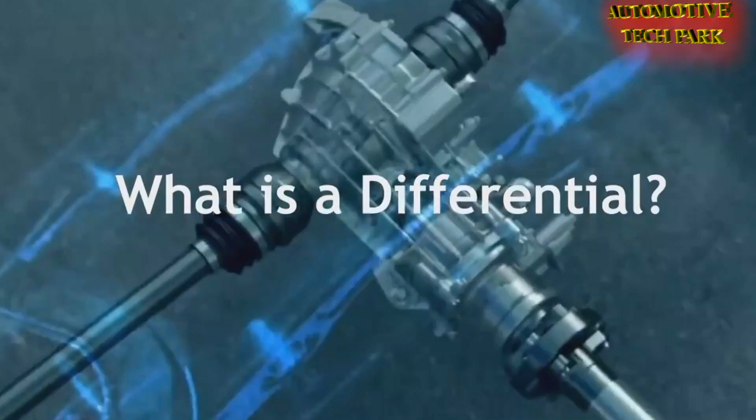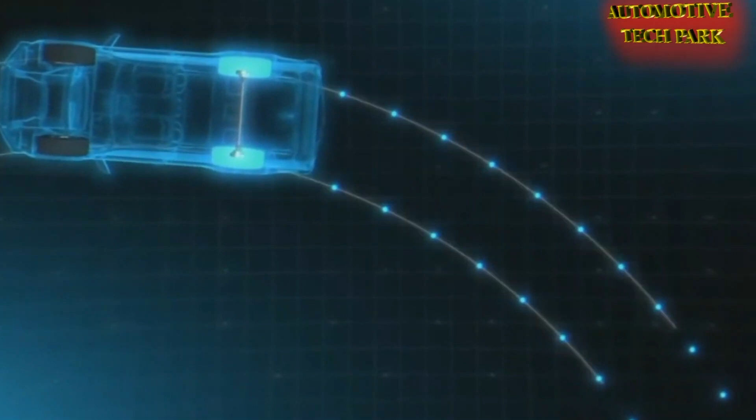What is a differential? Simply put, a differential is a system that transmits an engine's torque to the wheels. The differential takes the power from the engine and splits it, allowing the wheels to spin at different speeds during cornering, but at the same time, it gives equal torque to each wheel when both wheels have the same traction.

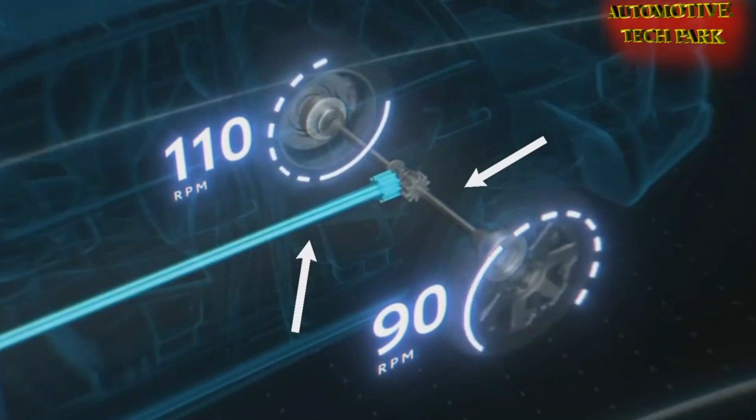A system of gears in the differential is arranged in such a way that it connects the propeller shaft to the rear axle. At this point you might be asking, why would each wheel spin at different speeds from each other? So that's what we'll discuss in today's video.

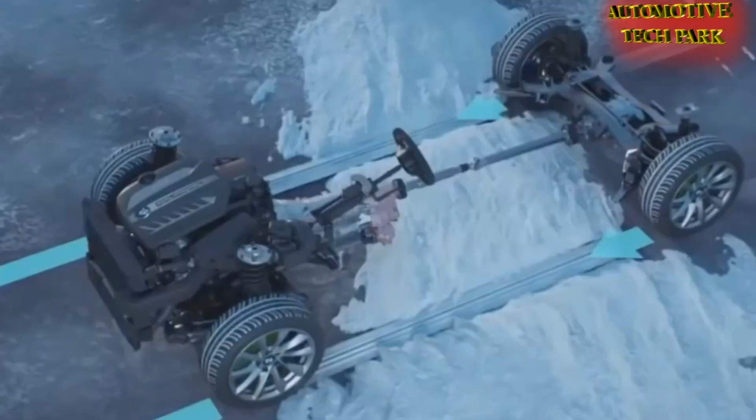The differential is found on all modern cars and trucks, and also on many all-wheel drive full-time vehicles. In 1827, the first conventional automobile differential was invented by a French watchmaker, Onésiphore Pecqueur, and it was used in steam-powered vehicles. In 1932, Porsche used the first limited slip differential.

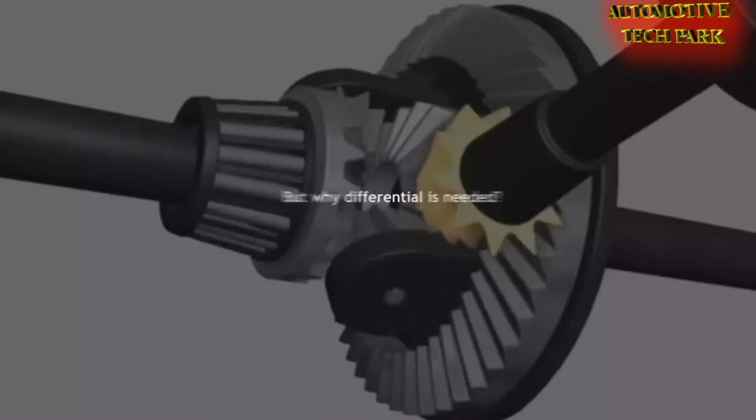But why is a differential needed in a vehicle? When the vehicle is turning, the differential allows the outer wheel to rotate faster than the inner wheel. This is essential when the vehicle turns, causing the wheel outside the turning curve to roll further and faster than the other. The differential allows the wheels to rotate at different speeds, so the car can corner without putting excessive wear on the tires.

If the axle does not allow the wheels to turn independently of each other, the tire of one wheel will be pulled across the ground.

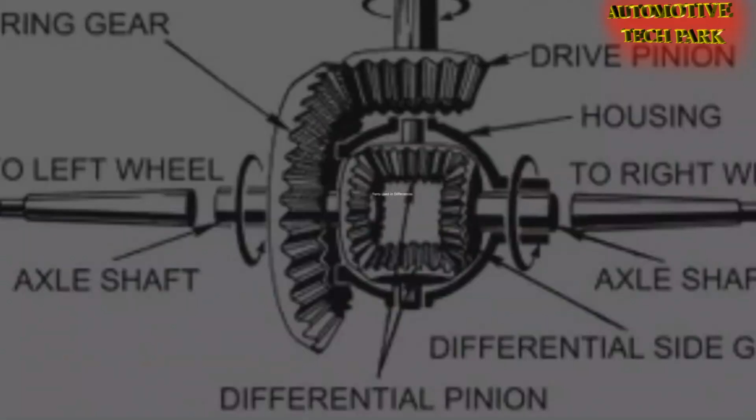Now let's find out what the different parts used in a differential are: differential side gears or sun gears, planet gears or spider gears, ring gear or crown wheel, drive shaft, bevel pinion, and axle or half shafts.

Let me give you an overview of these parts in detail. The ring gear transmits the power to the planet pinions, sun gears, and finally to the half shafts, so that power can be used to drive the wheels.

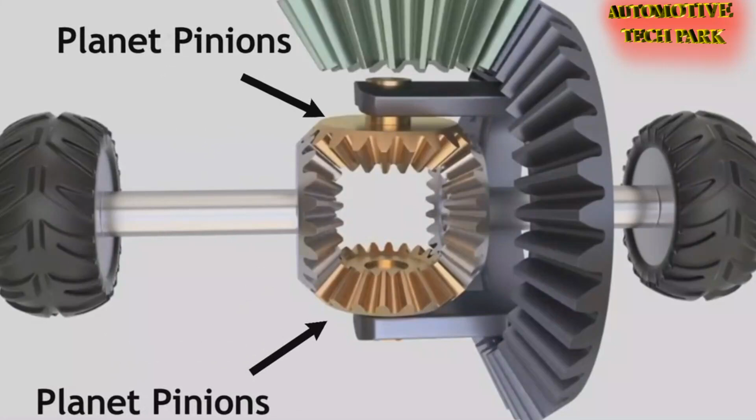Two planet pinions, or sometimes four planet pinions, are placed opposite to each other and are meshed with the sun gears, to transmit power to the rear wheels by half shafts.

The power from the gearbox is transmitted to the propeller shaft or drive shaft, and from there sent to the bevel pinion. The function of the bevel pinion is to transmit power from the propeller shaft to drive the ring gear. There isn't a single shaft connecting the two rear wheels; instead, two half shafts are used to connect them in the automobile.

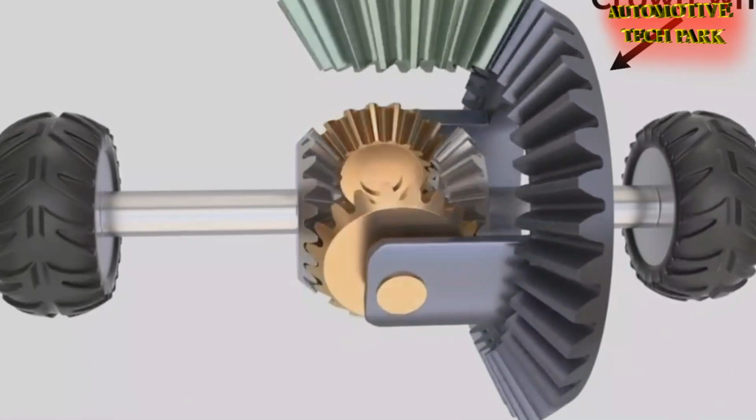The crown wheel is free to rotate on the half shaft, and these half shafts are splined to each of the sun gears.

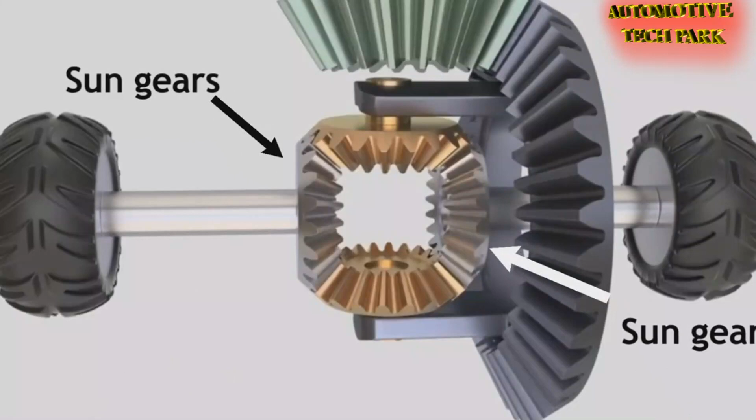Two sun gears are employed for the working of the differential, which are opposite to each other, and these sun gears are connected to the half shafts to drive the power.

How does a differential work? The power from the engine is transferred to the ring gear through a pinion gear. The ring gear is connected to a spider gear, which is at the heart of the differential system.

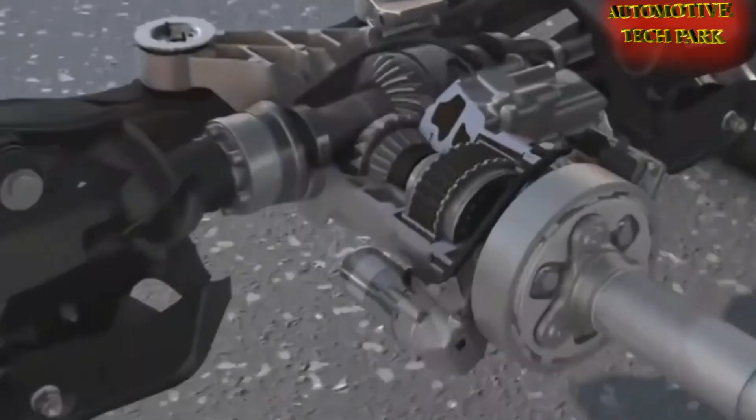The spider gear is free to rotate in two different ways: one along with the ring gear, and two on its own axis. The spider gear meshes with two side gears, so power from the engine flows from the pinion to the left and right wheels.

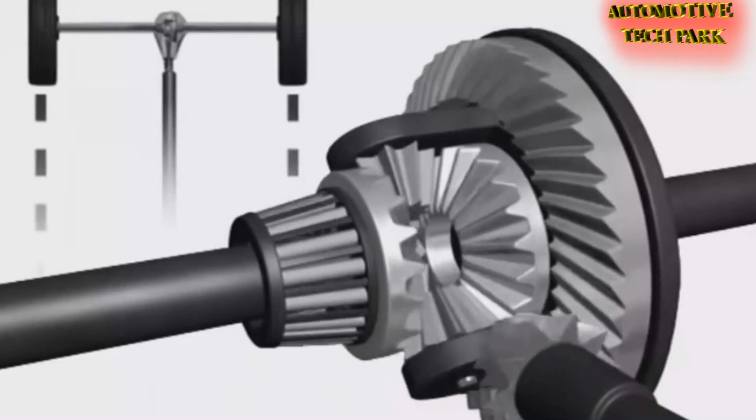Let's consider some cases. When the vehicle is moving in a straight direction, the speed of the rear wheels is the same, in the sense both will rotate at the same speed.

In this case, the sun gears, spider gears, and the ring gear act as a single unit, and the two half shafts revolve at the same speed. When all the parts of the differential act as a single unit, there is no relative motion among them, and that's the reason all the rear wheels move at the same speed.

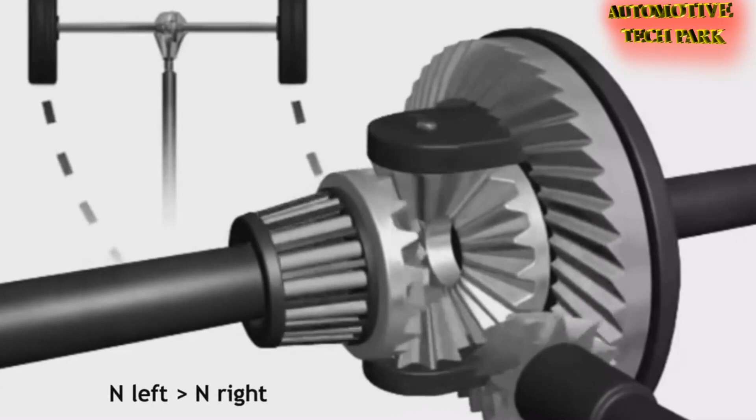When the vehicle is taking a turn, the spider gear plays an important role here. Along with the rotation of the ring gear, it rotates on its own axis, so the spider gear has a combined rotation.

When the vehicle is taking a right turn, the distance traveled by the left wheel is greater than the distance traveled by the right wheel, and the speed of the left wheel is greater than the speed of the right wheel.

The turning of one sun gear will cause the other sun gear to rotate in the opposite direction, which means if the left sun gear rotates for a particular period of time, the right sun gear will also rotate for the same period, but of course in the opposite direction.

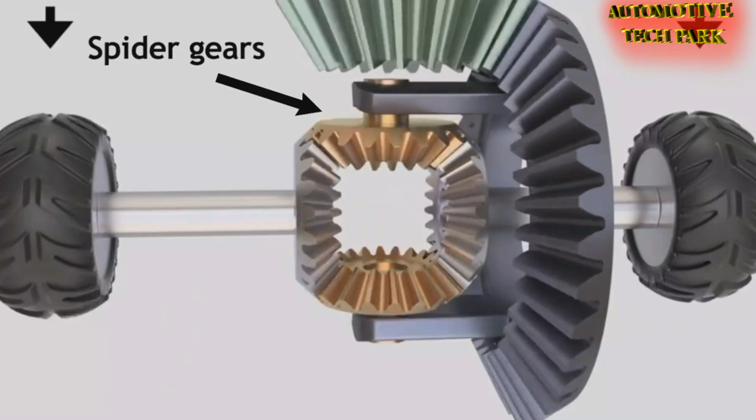The torque from the final drive is divided between the two half shafts, and the spider gears are connected by means of a cross pin, which they are free to rotate about, and this does not change the torque among the wheels.

Therefore, the spider gear acts as a balance, and divides the torque equally between the two wheels on the axle, even when their speeds are different. In this way, the torque is transmitted when the vehicle is taking turns.

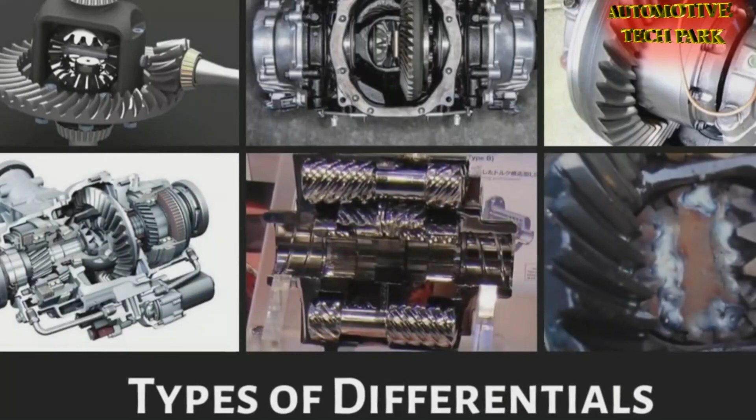Now let's take a look at the different types of differentials and how they work. The different types of differentials are: open differential, limited slip differential, locking differential, torque vectoring differential, Torsen differential, and welded differential.

Now let's take a look at how these differentials work, starting with the open differential. This type of differential is the most essential and only allows individual wheel speed or slip to be changed. In good road conditions, this allows the outer wheel to spin at a faster speed than the inner wheel. The problem occurs when road conditions are not good, such as on wet, snow, ice, or sand.

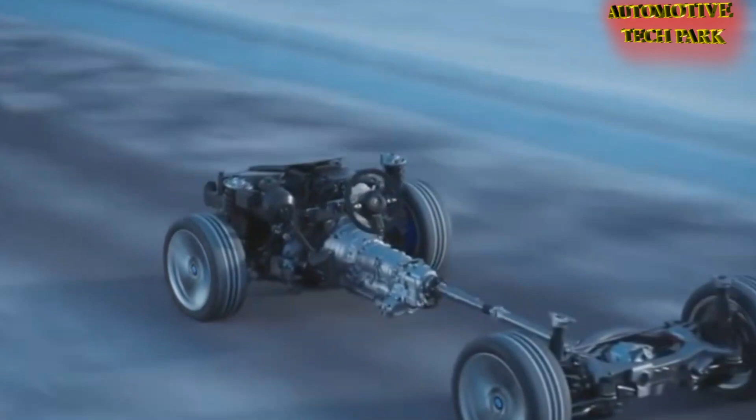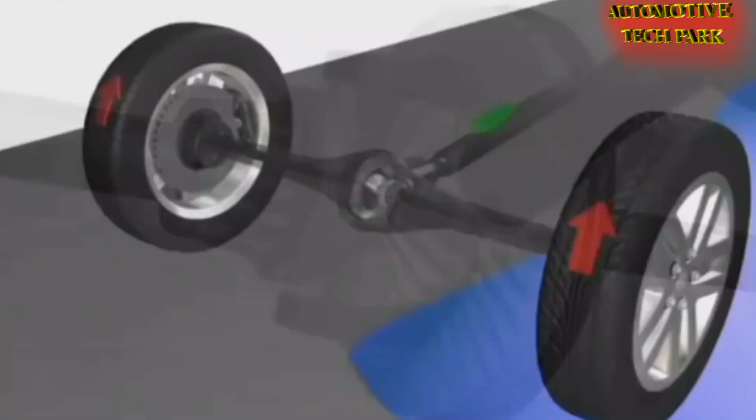Using an open differential in your car, engine torque is transferred even though the wheel has zero traction, so the sliding tire can spin freely. This type of differential is often found in family sedans and economy cars. If one tire loses traction, the other will lose power to maintain traction.

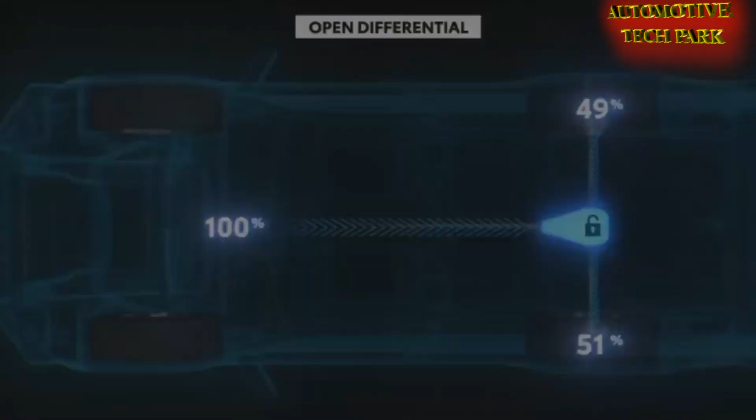Open differential allows for different wheel speeds on the same axle, which means there will be no wheel slip when going around a corner, as the outer tire will travel further. From an efficiency point of view, there will be less energy loss through open differential compared to other types.

When traction is reduced in one wheel, it substantially limits the amount of power produced by the vehicle. If one wheel cannot dissipate as much power, the other wheel receives an equally small amount of torque.

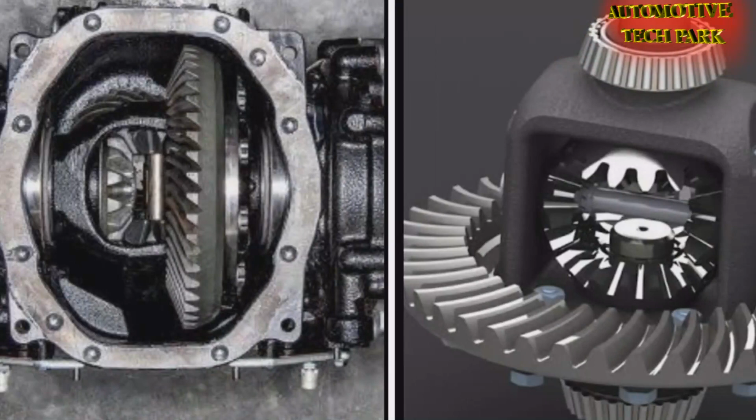A limited slip differential works similarly to an open differential. They transfer torque to each wheel independently under good road conditions. An open differential can cause the tire to slip under hard cornering or heavy acceleration.

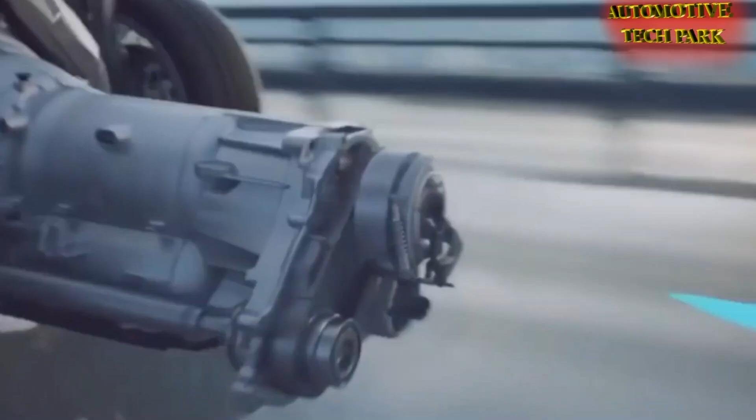But a limited slip differential prevents the amount of torque from passing into the sliding tire, the one with the least resistance. This is done by the use of clutches and plates within the differential. This allows the vehicle to power through corners, whereas a vehicle with an open differential cannot. Race cars, off-road vehicles, and other performance vehicles use a limited slip differential.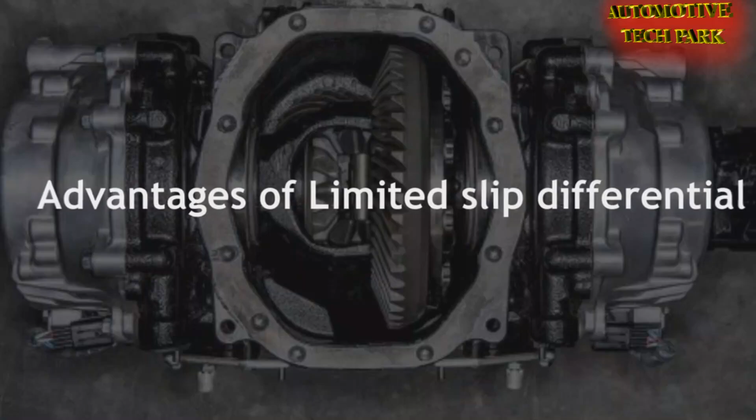Limited slip differential allows for different wheel speeds on one axle, thus reducing tire wear compared to a locked differential. It also allows the wheel to send torque with more traction. It offers a very smooth operation, doesn't have the low-speed clunkiness typically associated with other limited slip differential types that navigate a tight area.

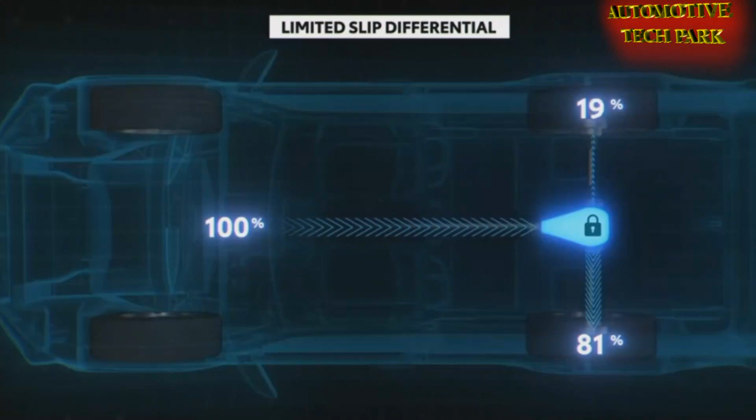It cannot lock completely because the system requires a speed difference between the two sides to transfer torque. When it is being used too often, the effect of limited slip differential will be reduced.

These types of differential use a clutch and springs to actuate the lock, which sends the same amount of power to each wheel. No matter the traction condition, it essentially forms a solid axle.

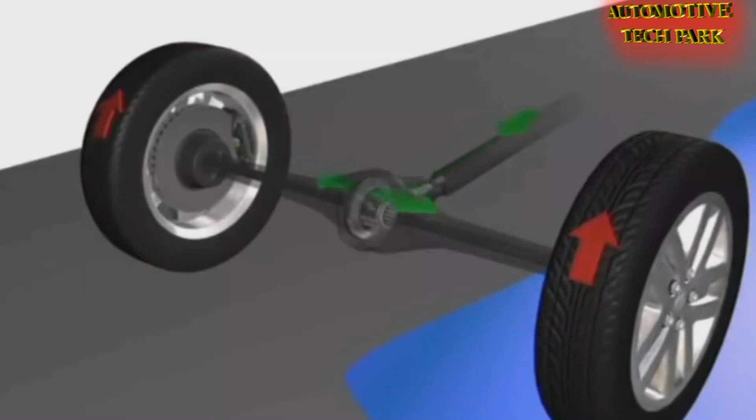Locking differential has the ability to achieve a greater amount of traction because the full amount of torque is always available to one wheel and is not limited by the lower traction of a single wheel. At higher speeds this is a drawback, but when off-roading or rock climbing, it is a huge advantage. These types of differentials are found on many off-road vehicles and some performance cars.

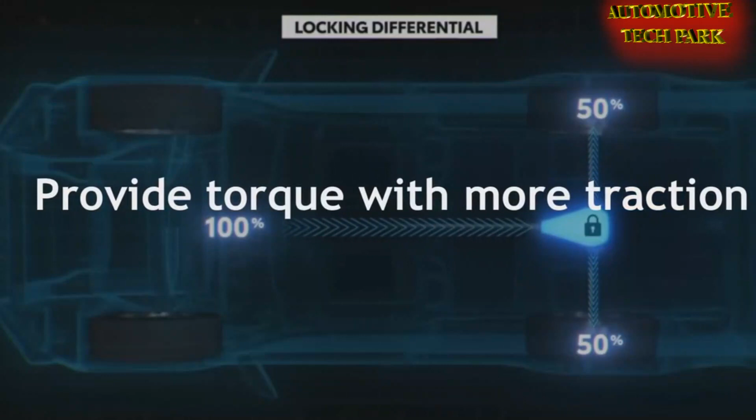This can provide torque to move up to the wheel with more traction. In various designs, this will allow most of the torque to reach the ground at any given surface condition. It is simple and very effective. And it also provides a solution for drifting situations where it is desirable to keep the wheel speed constant on the axle.

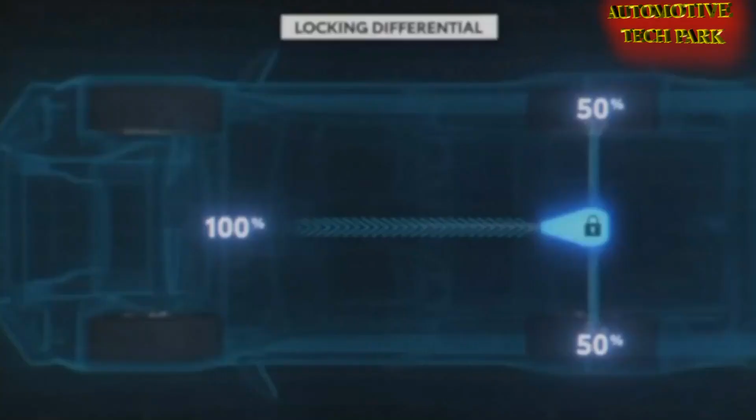One drawback of the locking differential is that it would not allow for a difference in wheel speed between the right and left wheels. That means additional tire wear as well as tying up within the drivetrain as a result.

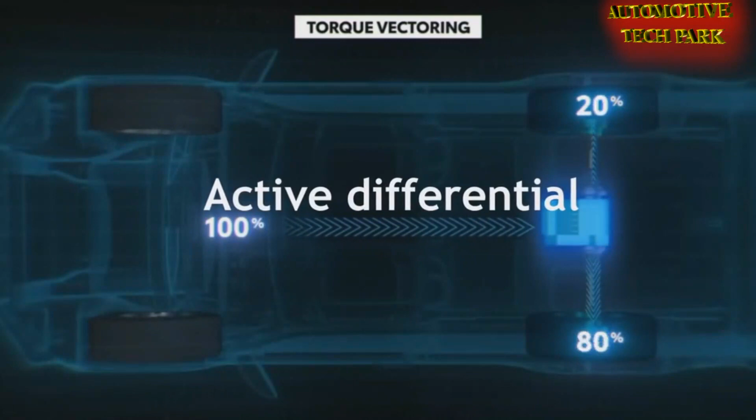This type of differential uses a set of sensors and electronics to receive data from various matters, road surface, throttle position, steering system, etc., to activate an electronically actuated clutch and a controller. It is also known as an active differential. They operate in the most efficient manner, resulting in a truly dynamic high-performance driving experience.

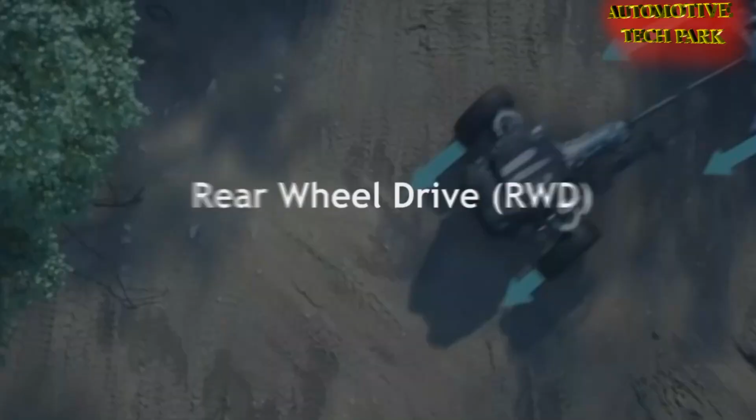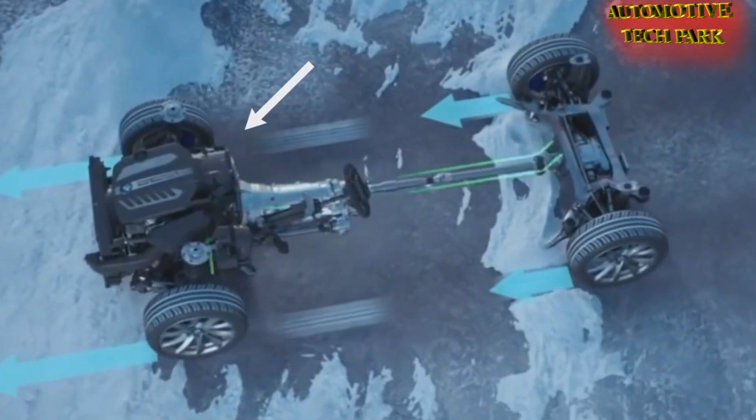A torque vectoring differential is found in high-performance rear-wheel drive and all-wheel drive vehicles. Full-time four-wheel drive and all-wheel drive have three differentials: one in the front axle, second in the rear axle, and third in the middle of the drivetrain, which allows the wheels to turn at different speeds.

This differential allows the outer wheel to send more torque as it gets closer to the turn. It enables complete control by the designer. The system can choose under what conditions the vehicle will send more torque to any one wheel, rather than being reactive. It can send up to 100% of the potential torque to a wheel.

Though it does not have many drawbacks, it does have two, which are cost and complexity.

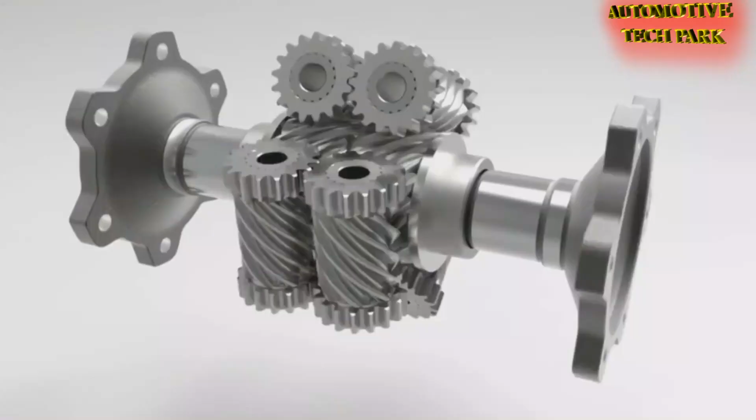This is achieved by having the worm gears in a continuous mesh with each other through connected spur gears. The continuous mesh between the two sides of the differential has the advantage of delivering quick torque, making it sensitive to changing road and driving conditions.

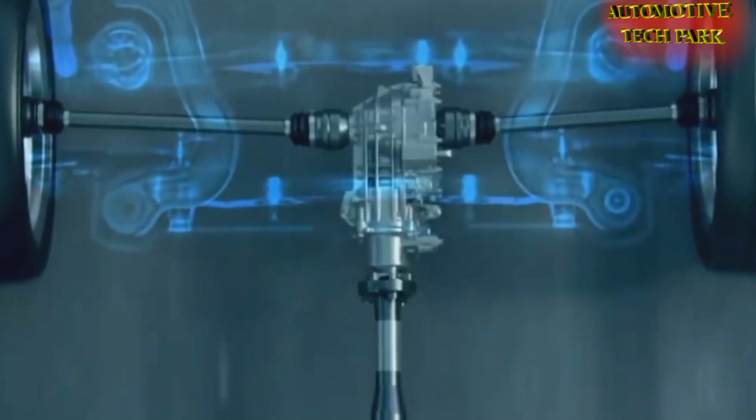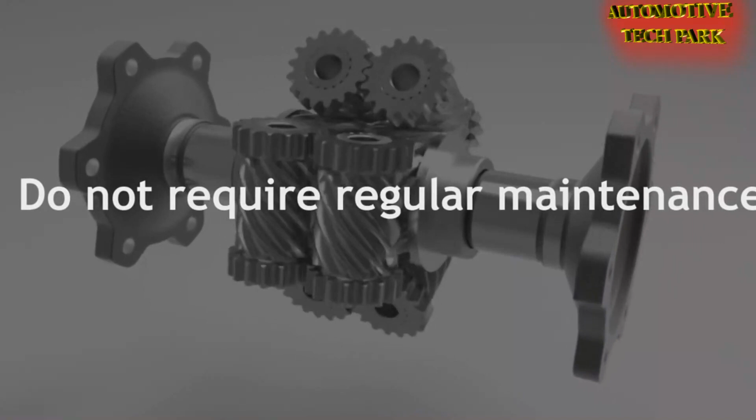As soon as there is a speed difference between them, it starts sending more torque to the slower wheel. Also, it reacts far more quickly than a limited slip differential. These systems do not require regular maintenance because differential action is dependent on friction throughout the gear.

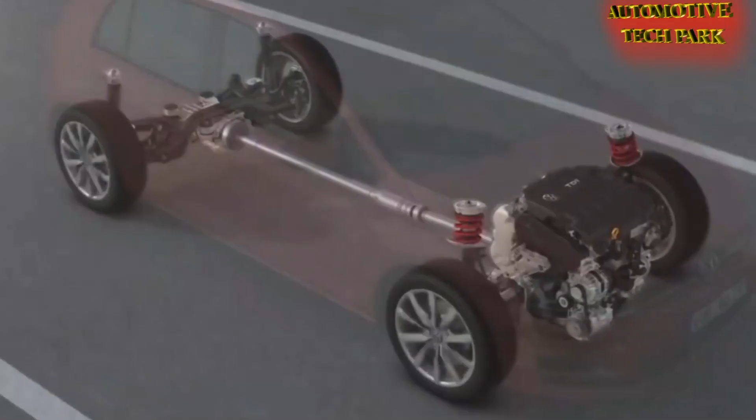When a wheel is in the air, a Torsen differential works similar to an open differential, and very little torque is transferred to the drive axle. This is perfectly acceptable for road use, but it can be an issue for more purpose-built vehicles on the track.

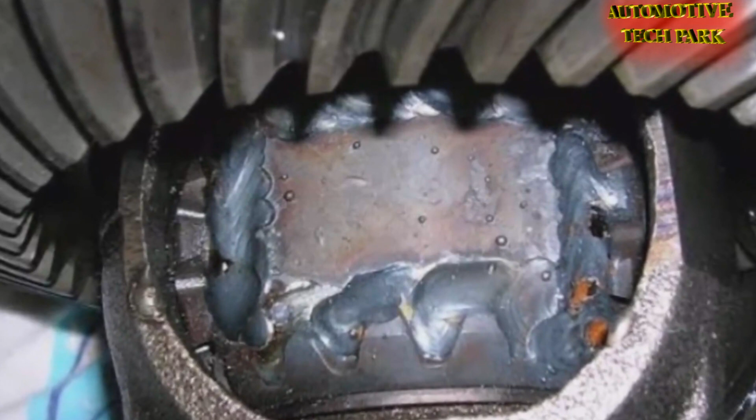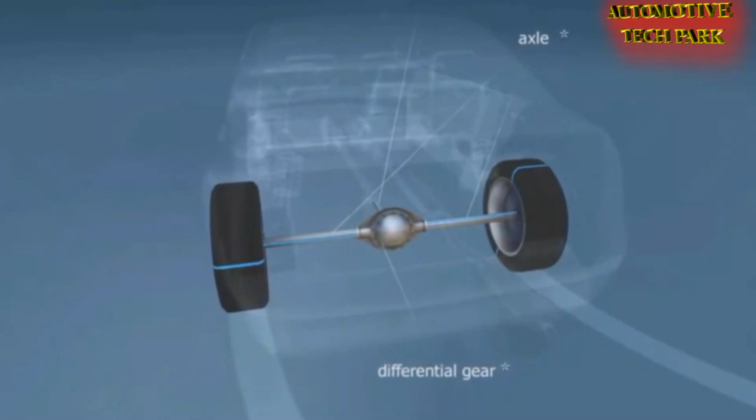So what do you think about these different types of differentials? Which one is the best? What are your thoughts? Tell me in the comments.